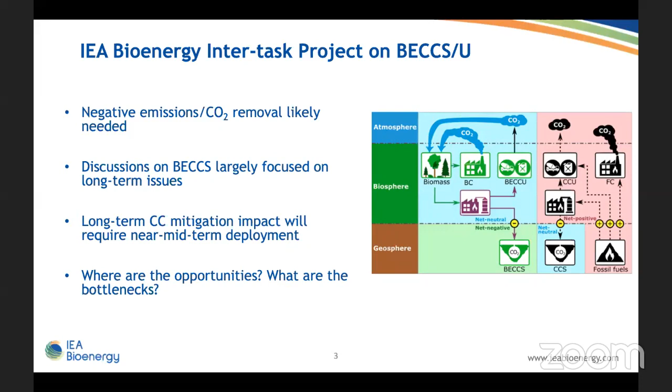So just to shortly walk through the supply chain, to give everyone an overview of the terminology. A very simplified BECCUS supply chain might look something like this. You start with some sort of biomass resource, which can vary widely depending on the application, of course. And then you have a process where you convert that biomass. Obviously, you do this for a purpose. It could be an industry. This could be a heat and power station or an ethanol production facility. But you're converting biomass in a way that converts the carbon in that biomass to CO2. This could be combustion, but it could also be fermentation, for example.

And then the next step is to take the CO2 once it's captured, and in a minute you'll hear more about the details of the capture part. The CO2 is captured and it's transported, and this could be within a facility. It could be very short if you're taking it to reprocess the CO2 in some way, but it could also be a very long distance if it's taken by ship to a storage site. Could be thousands of miles.

And then you get to a point where you either have storage in an underground reservoir of some sort, or utilization. And here you see the difference between the C and the U at the very end of the BECCUS part. That gives you just a short overview, and then I'll hand over to Tero, who will talk a little bit about the specifics of CO2 capture in different sectors.

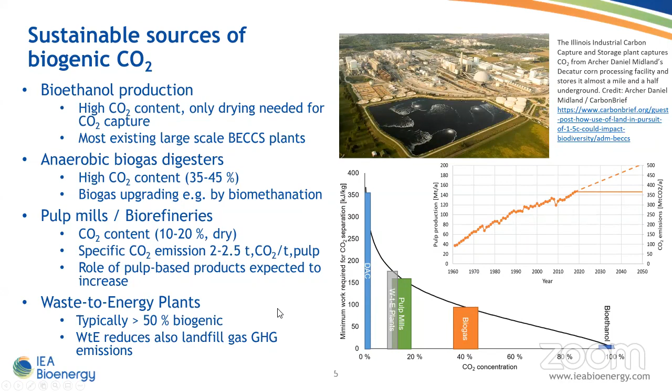So these concentrated sources like bioethanol, biogas, they are quite limited in capacity. They are easy starting points, but not really solutions for climate change scale CO2 capture. Then next come pulp and paper and waste-to-energy plants, which can be considered quite good and sustainable options for biomass. So these are anyway wood streams that are utilized, and we are now just utilizing the carbon in higher concentration, so taking also the flue gas carbon, capturing it.

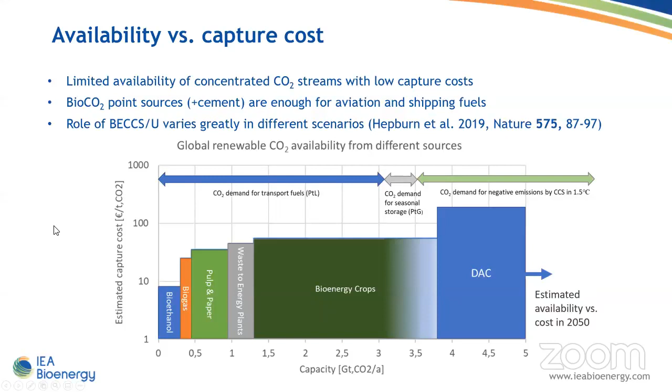And going to technologies, I don't go in this brief presentation into details, but practically all technologies that are available for, let's say, traditional fossil fuel CCS can be applied for biomass CCS. There are some differences depending on biomass source. Usually we have higher moisture content, higher hydrogen content than in most of the fossil fuels, so it leads to quite large flue gas condensers. We have very moist flue gases, and we need to condense flue gases to separate CO2, so we have very large flue gas flows to condense. This can be partly even a good thing. We have a lot of low temperature heat available in flue gas condensing, and that can be partly utilized, for example, in district heating or in CO2 capture, which also requires heat.

In some of the technologies like oxyfuel and calcium looping technologies, we use calcium oxide and oxygen for separating CO2, and in some processes, pulp mills are a good example, these materials, calcium oxide or limestone, oxygen and carbon dioxide, are used also in the pulping process. So there are several integration possibilities which can make it easier and cheaper to capture CO2. Also, when we go to carbon capture and utilization, we combine CO2 with hydrogen, and hydrogen is produced usually by electrolysis, and then byproduct oxygen from water electrolysis can be utilized for CO2 capture, as one example of integration to bioenergy CCU.

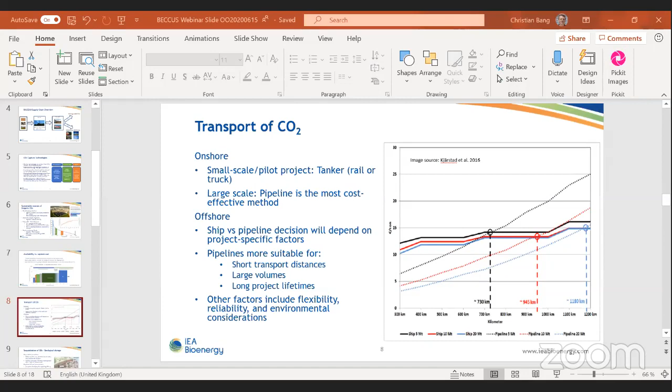Having captured the CO2, the next stage is transporting it to where it'll be stored or utilized. And how to do so largely depends on the quantities being transported. When we're looking at onshore for small scale and pilot projects, this will largely be by tanker, rail or truck. And moving up to medium or large scale projects, pipeline is the most cost effective method. Pipelining of CO2 is a well-known and mature technology. It's been commercially used in the United States since the 1970s. When we move to offshore, it's a little less straightforward.

In terms of whether it should be shipping or pipeline, it will often depend on some quite project-specific factors. For pipelines, some of these factors include the terrain through which the pipeline will cross, the diameter of the pipeline, and length. But generally speaking, pipelines are most suitable for short transport distances, large volumes, long project lifetimes, and relatively constant CO2 flows. A 2016 study in the Nordic context, for example, looked at transport costs with annual amounts of 5, 10, and 20 million tons.

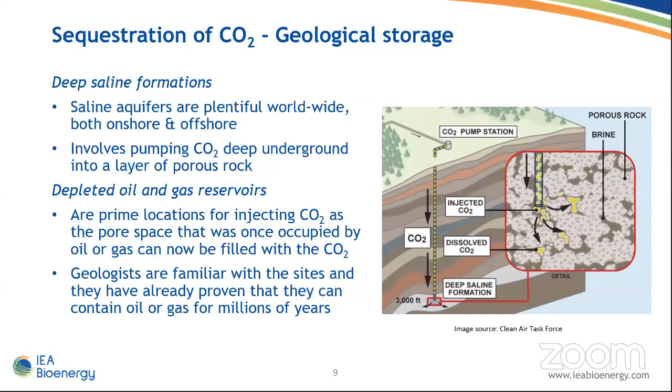Now, an alternative to simply sequestering it is utilizing or sequestering portions of it. And a very prominent example of utilization of CO2 on a large scale today is via enhanced oil recovery. This is essentially injecting CO2 into an oil well to increase the recovery rates. And at good sites, recovery rates can be increased by almost 50%.

Now, it's important to note that some of the CO2 returns to the surface with the oil, while a portion of the injected CO2 is sequestered permanently. But today, oil companies generally have to pay to receive the CO2, so there's a very high incentive for them to capture the CO2 that comes up with the oil and re-inject it. So in this sense, we can say it's a relatively closed loop.

Based on 2017 data, there were roughly 100 CO2 EOR projects globally, and they produce almost 500,000 barrels of oil per day, the vast majority of these being in North America, I think over 85%. Currently though, for most of these projects, the CO2 they utilize comes from nearby natural sources. That is to say, it doesn't come from capturing at a power plant. But there are some exceptions. For example, a few projects have illustrated the feasibility of utilizing captured CO2 from gasification or gas processing plants.

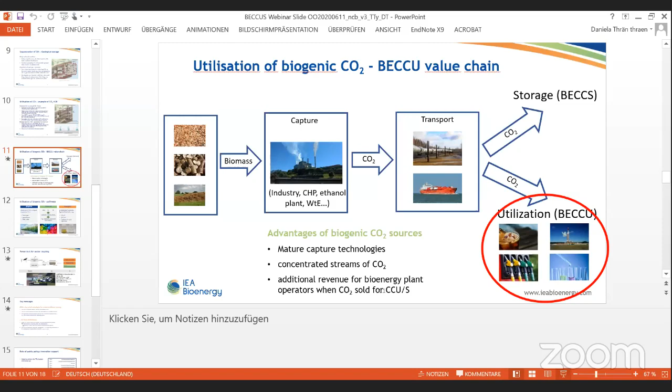Thank you very much. I'll just also introduce myself. My name is Daniela Thrän, and I will now follow the utilization of biogenic CO2, the BECCU aspect along the value chain.

Utilization of CO2 is possible and also already realized with fossil and biogenic CO2 sources, but we have heard that there are some advantages if we take biogenic sources, such as we have mature capture technologies, we can build on concentrated streams of CO2, and we can have additional revenues for the bioenergy plant operators when CO2 can be sold for CCS or CCU.

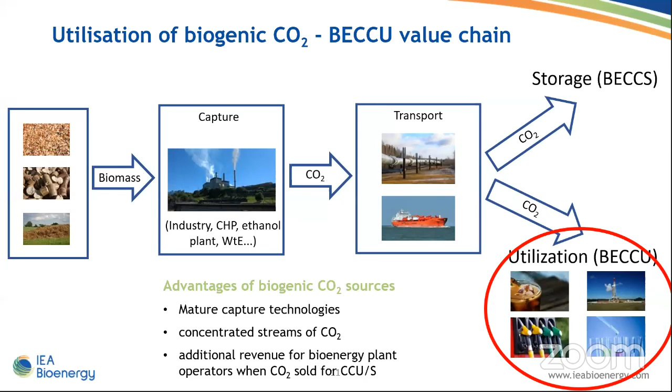Utilization of biogenic CO2 sources can be realized in different pathways. The physical pathway, direct use of CO2 in liquid or gaseous forms, such as beverages, greenhouse CO2 fertilization, or enhanced oil and gas recovery, which is connected to storage and what we already heard from Christian.

Material use of CO2 is typically a combination of CO2 with hydrogen to produce synthetic hydrocarbons, for example, platform chemicals and plastics, as a product from the transformation of the hydrocarbons. And the same approach is done if we go for energetic use. Here, the hydrocarbons which are produced are typically diesel, jet fuels, or also gaseous fuels like methane for grid injection.

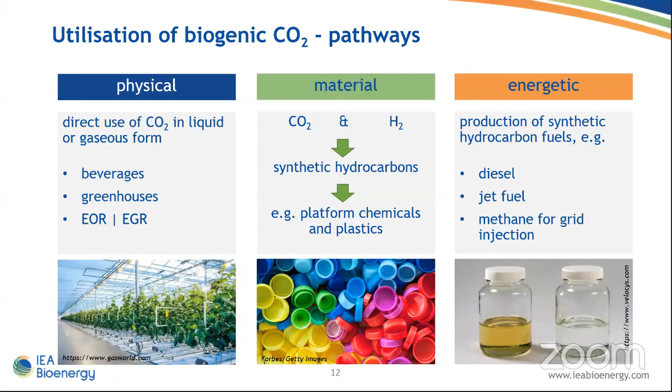When the hydrogen is generated from green electricity, the hydrocarbon generation of the materials and energy is called power to X. Power to X consists of typically a fluctuating renewable electricity source, wind and solar, which drives electrolysis of water, where oxygen and hydrogen are separated.

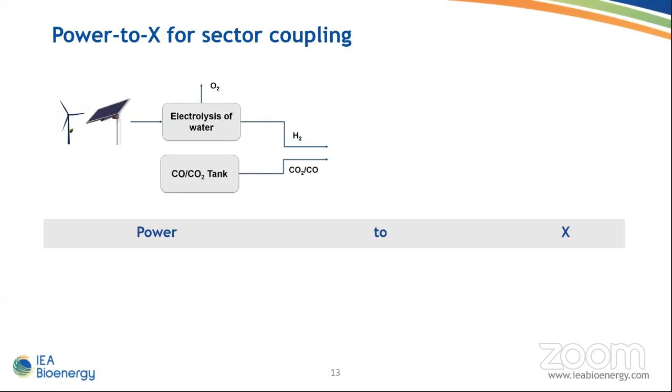And in parallel, we have a CO2 source. We heard already a lot about possible sources here. And those two streams are combined in a power to gas or power to liquid reactor to produce power to liquids, power to gas, or even chemicals.

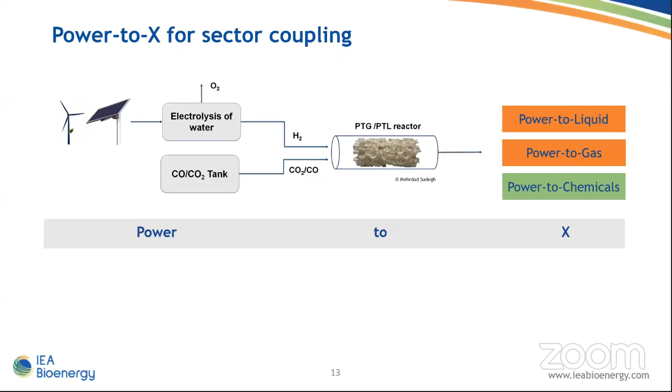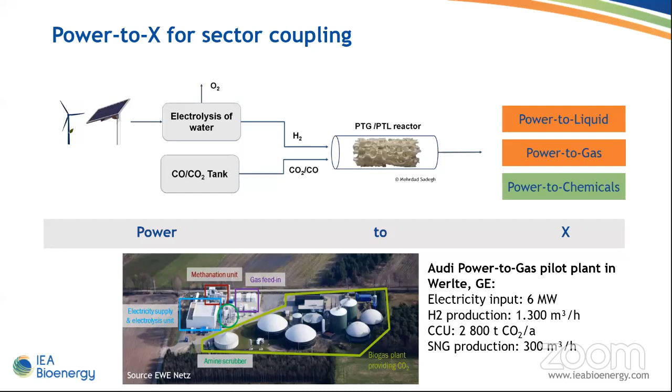In sum, CCU is an important technology for more resource efficiency. CO2 from renewable resources extends the resource base. I've shown you we can, let's say, have a longer value chain, but it is also a form of waste treatment that contributes to a circular economy and reduces waste streams. It can generate additional value and drive innovative business cases in new market segments.

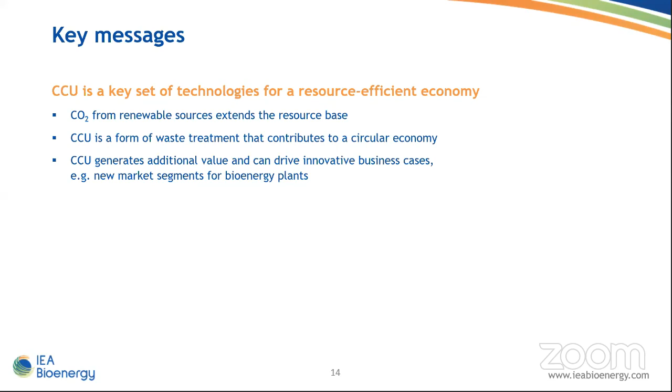So far, we have to state that Power-to-X applications are often more expensive than other options, for example, bio-based fuels. And we also see additional limitations in that we need large CO2 volume flows. This is a limitation for all kinds of BECCS and BECCU processes, which can be addressed by biomass co-firing or by pooling from smaller scale sources.

And it's important to understand that CCU can contribute to CO2 reduction, but even under optimistic long-term assumptions, this is a share of up to about 6% reduction of anthropogenic emissions. So it's interesting but limited. And with this, I would like to hand over to Ole.

Ole, we don't hear you yet.

Thank you, Daniela. So to conclude here, I would just like to say a few words about how public policy could be used in taking BECCS further up the TRL ladder and getting it to commercial stage. So obviously, there's a lot of issues that need to be cleared up here pertaining to regulatory questions.